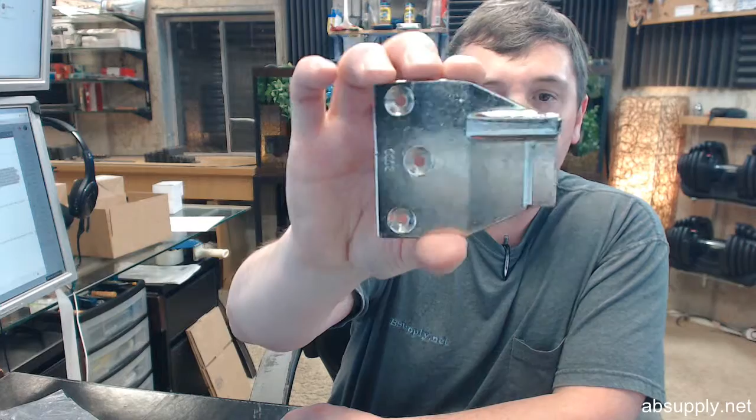Hello, my name is Rich Howard, owner of Architectural Builder Supply, and this video is to bring you a closer look at the Global Door number

TH1100-Dblstal double door strike. This is a surface-mounted strike plate that's used in a pair of doors when you have a rim exit device on the active, and on the inactive you have maybe flush bolts or maybe a surface vertical rod exit device, or surface bolts, or some other means of holding the inactive door closed. But when you use a rim device on a pair of doors, you need a surface strike like this to make the latch bolt work.

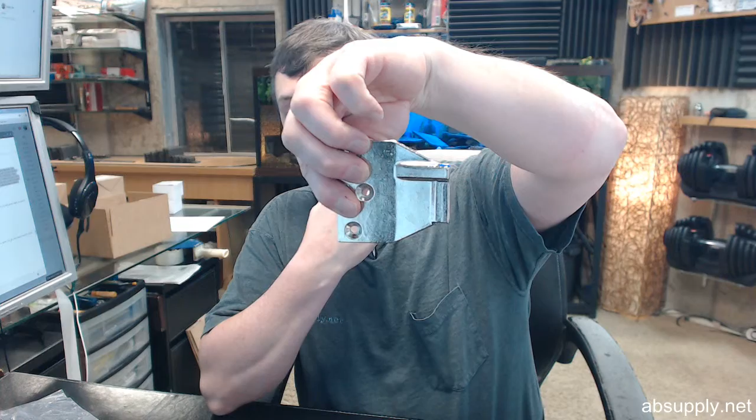Okay. Now, this strike is specifically for the Global Door TH1100 series exit devices. They say surface vertical rod exit devices. If you were using that on an inactive door, that would probably work. But the truth of the matter is this goes on the inactive to use with a rim device.

Now, it's important to know that this is for the TH1100 and devices that have the same orientation as the TH1100, meaning the deadlocking tab that will be in the edge of the head case is mated to this ramp, and this is the item that keeps that depressed so that you can't tamper with the latch bolt.

It's non-handed in the sense that you can put it on a left-hand reverse door or a right-hand reverse door. It doesn't matter. Now, obviously, that's not symmetrical and it changes, but when you take the device and you turn them both over, it doesn't matter. So you can use it on either side.

Now, if you had an exit device that had the tab on the opposite side, like a different manufacturer, sometimes it'll work, sometimes it won't. So do keep in mind how this item is going to be portrayed. So this will be in the event of having a left-hand reverse active door.

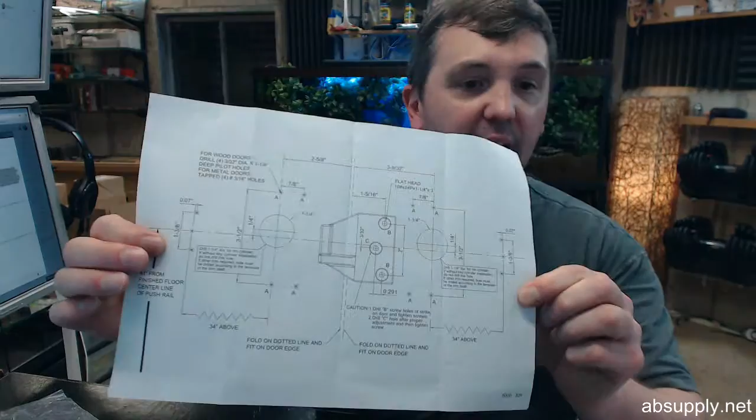Now, there is a link below this video to a document called template, I believe. Yeah, it's called template, and it will be included with your hardware. You're going to have this face, and then there's this opposite side. This side has the holes shown out for the TH1100, namely this 3.5-inch dimension for the holes of the head case. The other template has holes that are much larger than that.

I am unsure which Global device that is for. It might be for their ED-500, which is relatively new, in the sense that Global Door and Transatlantic were sister companies, and now they're all Imperial USA. And it's very likely that it has the centers for that as a template, but I don't believe this to be the right strike because that deadlocking tab is shown on the opposite end. So do a reality check before you drill any holes.

Now, the template basically gives away the punchline on how to make sense of this. This is going to be your active door over here, and it's going to swing out this way. So you're basically going to take this strike plate and let it hang over the opening so that it sticks out into the opening but will catch the latch bolt.

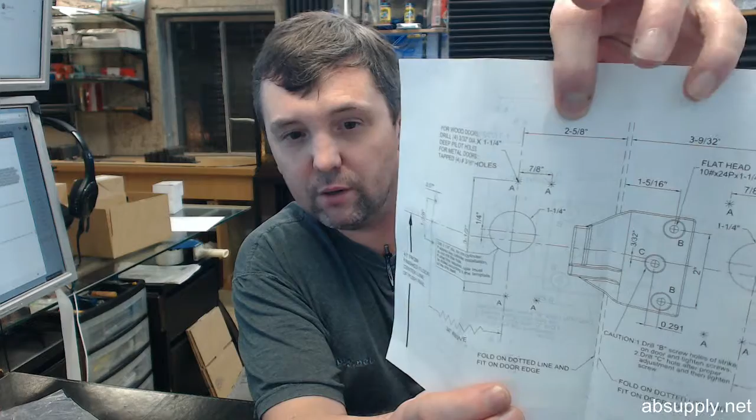And you're going to install that after your reality check of making sure the dimensions are accurate based on the backset dimension indicated here. Edge of the door, well, pardon me, over here, forgive me.

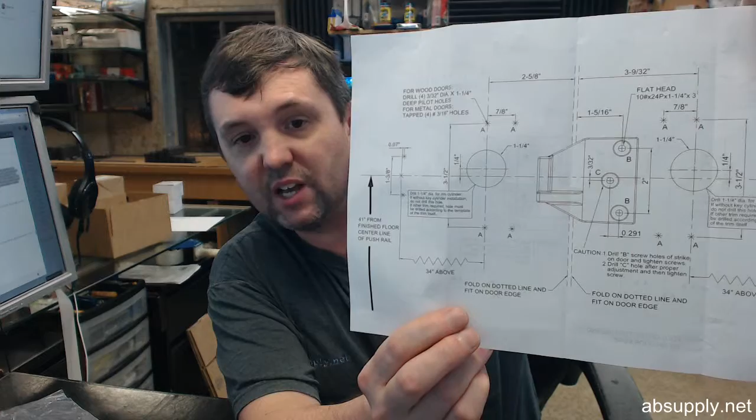Edge of the door to that B hole is 1 5/16. That will make it work splendidly with your unit. You're going to see there that you have a device center line at 41 inch from the finished floor to the center line of the strike. If you've got an outside key control, namely a rim cylinder, you'll offset that by 1/4 inch. And I'm referring to all of this information here and then here.

So the center line of the strike, the 41 inch, that is the manufacturer's guideline. That's very typical and ubiquitous. That dimension can play in accordance with how maybe a door you already have is drilled, that sort of circumstance. What I like to do is mark it out per the template, and then I like to make sure that it works before I drill any holes. While it's very uncommon, the templates do change with time, or maybe the template has changed but the new template's not included with the hardware, so do a reality check.

Now, the disadvantage of having a rim device on a pair of doors is that you have this strike hanging out into the opening. And let's put a tape measure on it. They don't give you really any dimensions, but an overall width, about 2 7/8, an overall height, about 2 5/8. Okay, you can see that that's slightly offset there. The disadvantage is you've got a lot of the strike hanging into the opening. When you open that active door, you've got about 1.5 inches of it or so hanging out.

The advantage is that you are able to use an inexpensive exit device on a pair of doors, where otherwise you would need a mortise device or you would need a surface vertical rod. So the upside really is getting a simple device, rim device, that is easy to install and very simple in its design, robust, will handle lots of use and abuse, and is incredibly economical. So that's the upside, where you don't need surface vertical rods. You don't want to have to deal with those or install them or buy them. The installation is obviously more involved.